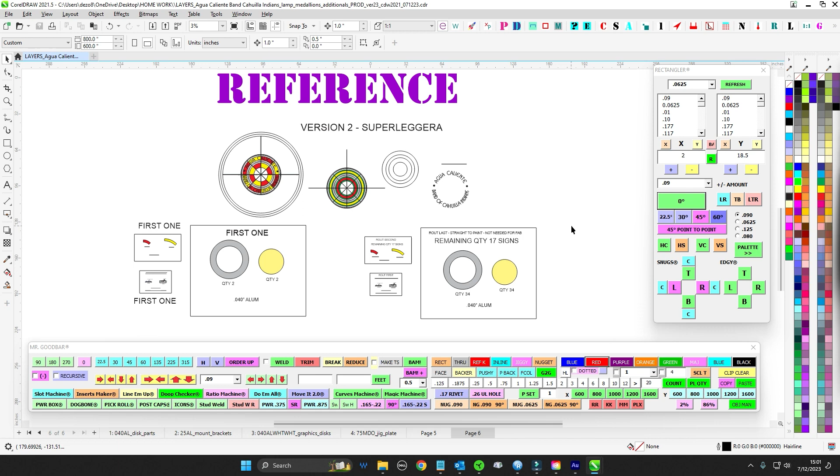So there's a lot of digging in the crates, dusting off, a lot of 'how the heck did we do that' kind of thing. But I think we got it figured out. We have some good documentation, good pictures from last time, so this is gonna help you guys through like 80% of it. It'll be pretty self-explanatory with all the pictures, but there's a few things I want to point out just to make sure no confusion. So let's get after it.

Lay of the land: we are doing 040. Yes, 040. This thing, the whole idea is it needs to be as light as possible. The engineering just barely allowed us to put this up here, and the pole company was very strict about how much the pole could handle. So it's very important we don't call audibles and make it heavier than what we designed it to be. So 040 parts, yes, quarter-inch brackets - look out for these.

And then 040 white on whites - these are just for the graphics, going to paint and then write the graphics, so this isn't for fab per se. You'll have a jig template. I am looking for 3/4 MDO, and it's going to be routed halfway down, and then we're good to go.

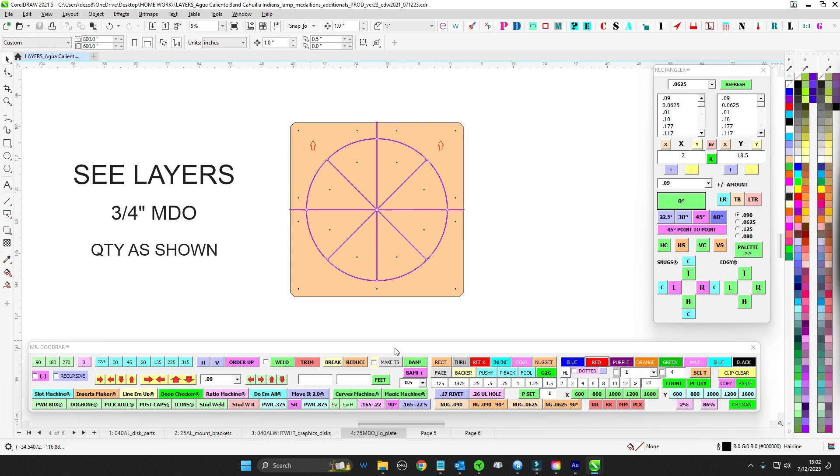So like I say, there's not a lot going on, just want to point out some stuff. So the main thing is let's look at the pictures from last time. It's great - so this is what you're aiming for.

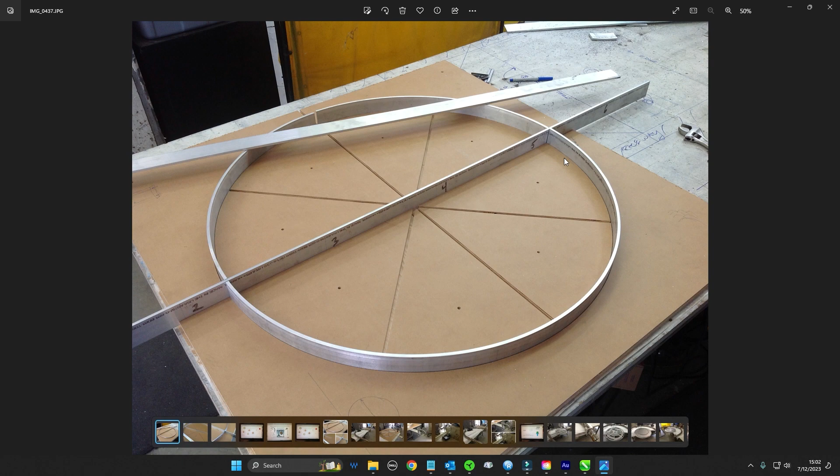You're going to be getting this jig again. Now, unfortunately, I mean it's great we have pictures, but this was the first prototype and we did it out of 1/4 inch, thinking it would be light enough. This was Ernie - Ernie knocked this out, he did an amazing job. What's up, Ernie? So anyway, we're just replicating this, but we are doing it out of, look at that, Corel 15. Good Lord, I didn't know what I was doing at all.

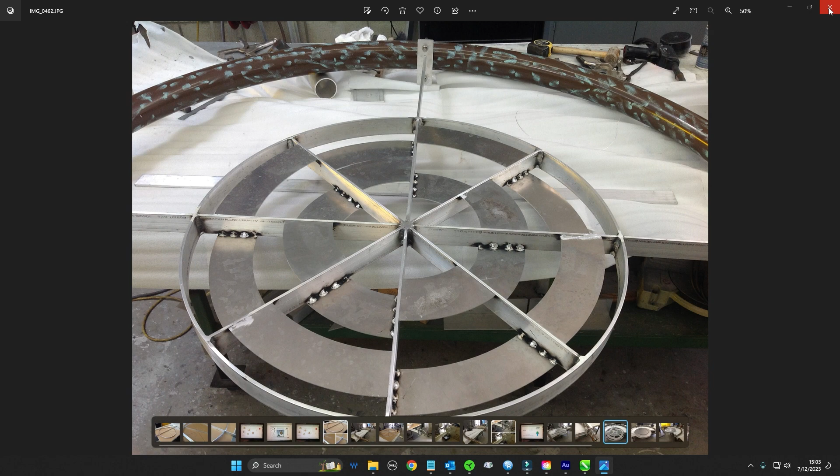So anyway, what you're going to be doing is looking for this. Obviously your brackets are very similar, everything's kind of the same here. So again, the pictures do all the work for you - you can see what you're aiming for. So let me show you how we'll get there. Looking for this, get your jig ready to go.

So first and foremost, cut list. Your main bar is a known, easy number, 68.5. Your tall boy here is an easy number. And then you have one drop down here, 17 and 13/16.

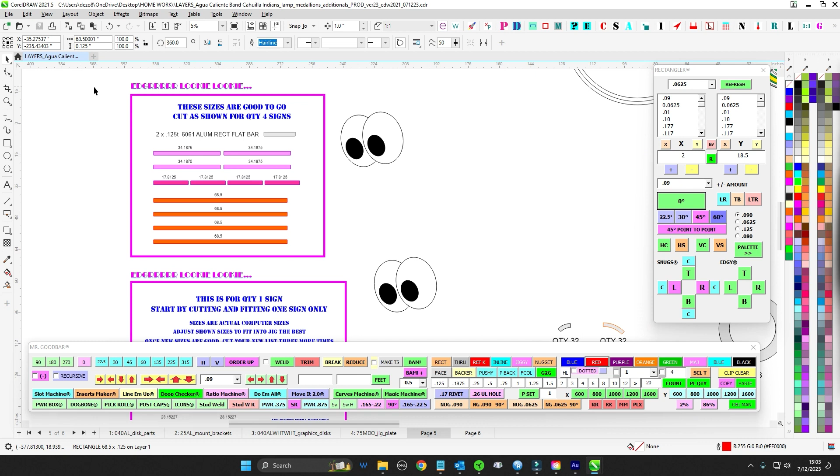So you have 2 cut lists. The first cut list is all the known parts that are good to go, so go ahead and cut all these parts. This will be for 4 signs, 4 medallions.

And then the other one is going to be the tricky parts that you are going to be sort of custom fitting on there. So that's going to be this top part here, you can see where it meets up - this is like the top bar that goes out, that's this guy here. So you'll have to custom cut this one to fit. The bottom bar is one wrap around like that, so you'll have to custom that.

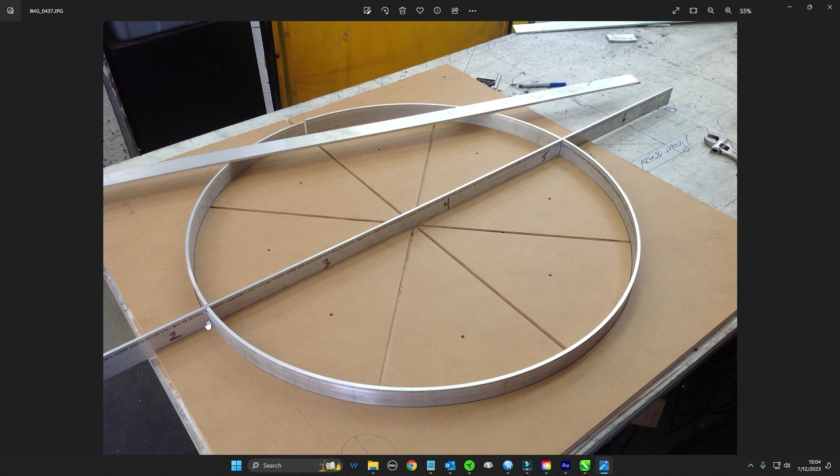And then, so those are the ones, plus these ones that are at 45 will also need to be cut. You can see here he's got that little extra that he cut off. So that's what I'm saying, is that you'll have 2 cut lists.

On this one, I encourage you - I went ahead and put the computer sizes. I know this doesn't do you any good with a tape measure, but these are your 4 diagonals. So how those diagonals fit in, like this is kind of funky, and then how they're going to butt up against here on the curve. So get your curve in there first, and then how that cuts.

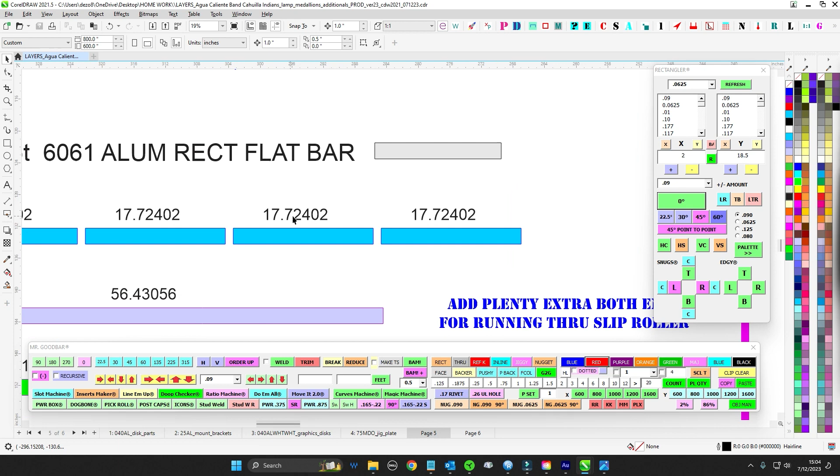So you can decide what this means to you. Once you get those kind of noted and how you like them, then note that 56.43 is what it takes to go around by the computer.

But then you might want to go ahead and add on 4 inches on each side, like here for the slip roll, right? And then add on 4 inches or 3 inches over here for your slip roll as well. So go ahead and figure that out, add that up, and then you can start chopping those.

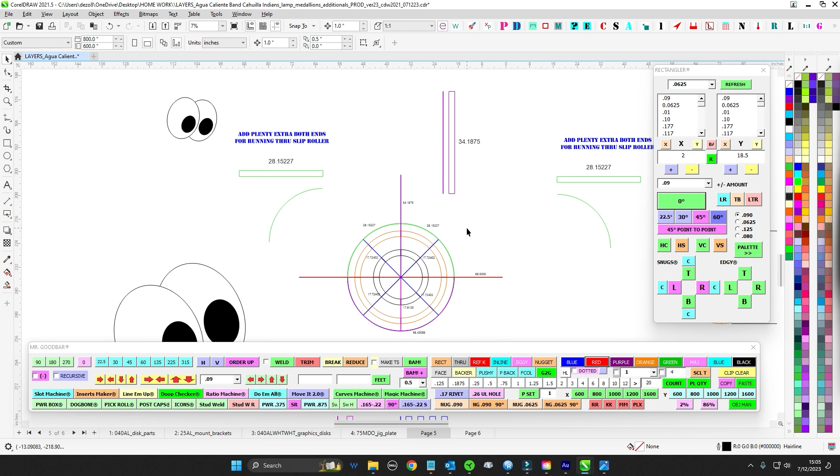Same thing here, 28.152 is what it takes to go from here to here. So go ahead and add on your slip roll material there, and then get it dialed in. So you can cut this list first, dial in one of them, get it dialed, and then cut all the pieces you need for the rest.

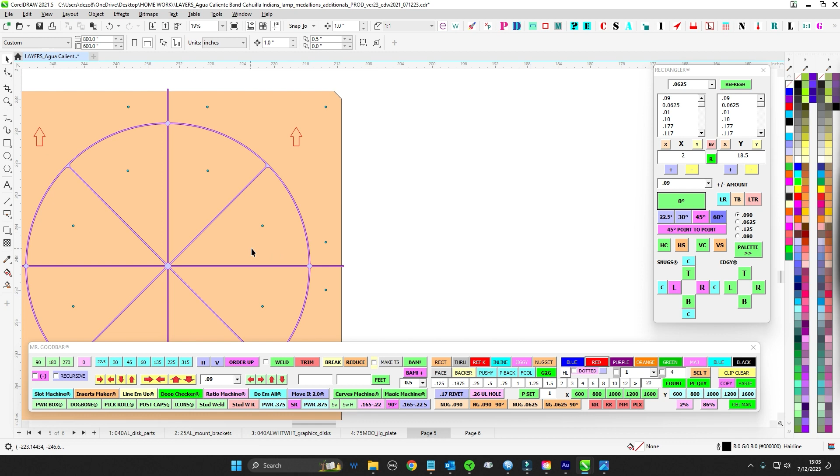What I encourage you to do is while you have this wood jig out, go ahead and put marker and mark it right on the jig what sizes you cut for this one, and put a little arrow saying cut this one to XYZ, whatever it is. That way when we're done, we'll put this up in cold storage. Mark the job and mark the date on it. I don't think there's a reason to throw this away this time, because they might want more, who knows.

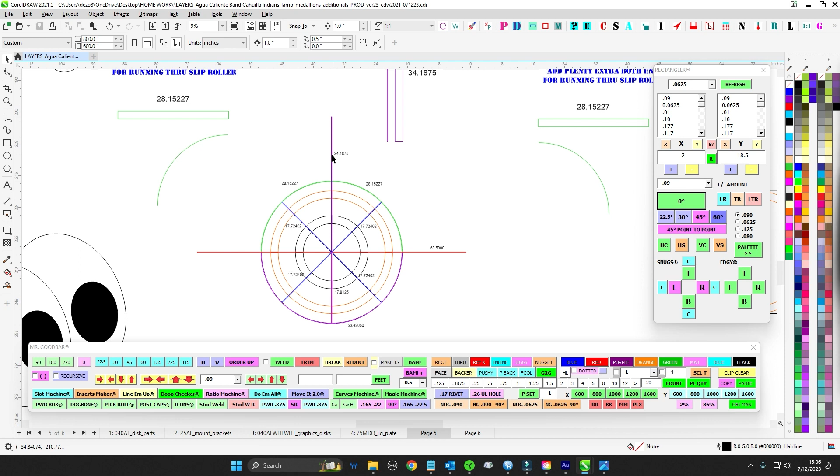So that takes care of the cut list, getting all that taken care of. And then once you have these crossbars, the top one here and this cross one that has the brackets on it, let's get after the brackets.

So you can see how the brackets are going to be. They're like this - oops, get rid of that. Yeah, come on now. So you'll have this part here coming up and this part here, and that hugs the bar. And then you'll just burn it here and here.

Doesn't need to be crazy burned, just enough to hold it together. You can tack on the inside. So that's going to be enough for that. And then you can see where that's going to bolt onto the actual post.

When we first did this, they gave us an actual post. Obviously we probably won't be getting a post from them because we already did it. They assured us that post is the same as the other one, so we should be able to just duplicate what we got.

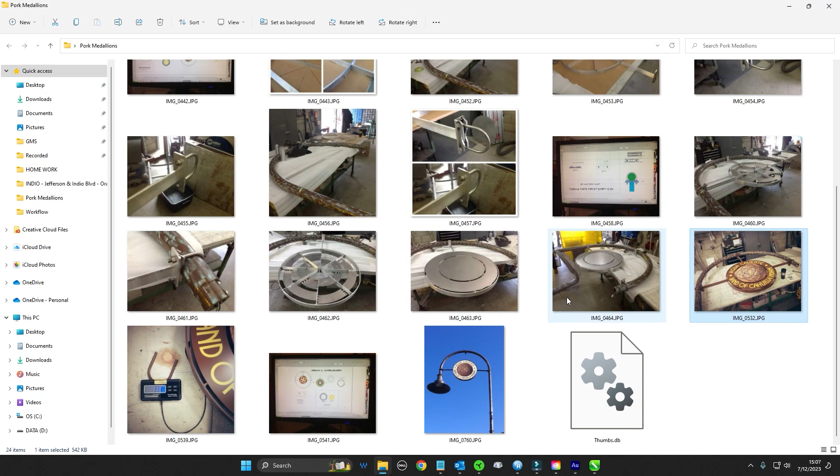As far as the brackets are concerned, what you want to do is slide this bracket onto and match the curve up with the end of the bracket, and that's going to give you your stick out.

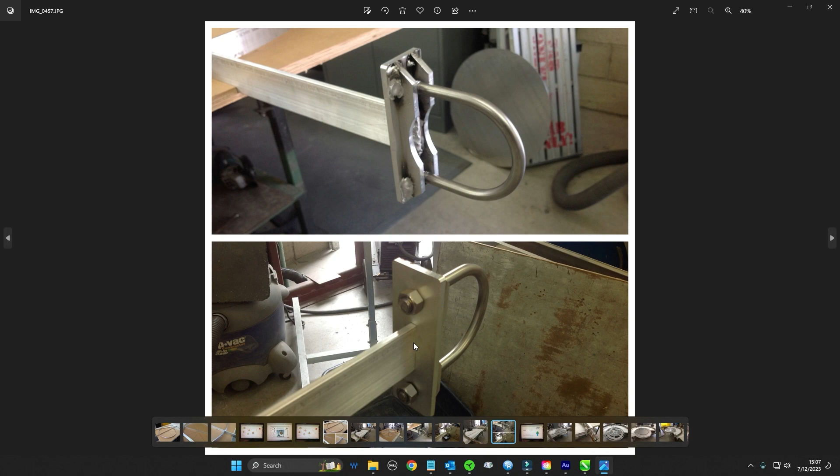And you can see on this one here, we don't weld on the back side. We want to keep that kind of clean. So you're just going to burn on the inside, and that's going to melt the bar to the bracket there. And that's what's going to keep it in place there. So that's what you want to do there.

Now you can tell Ernie made a pretty good call here where you're going to want to burn the brackets on first before you assemble the wagon wheel. That way you can keep these flat on your table, because otherwise you'll have to burn these vertical, and obviously vertical aluminum is a crappy weld. So go ahead, while these are just flat, burn that on, you're good to go.

And then you can assemble the wagon wheel. Now as far as assembly of the wagon wheel is concerned, I would encourage you to not burn the actual thing while it's in there - try to save it. So just like he's got here, you just want to go ahead and tack it together really well, and then very carefully pull it out.

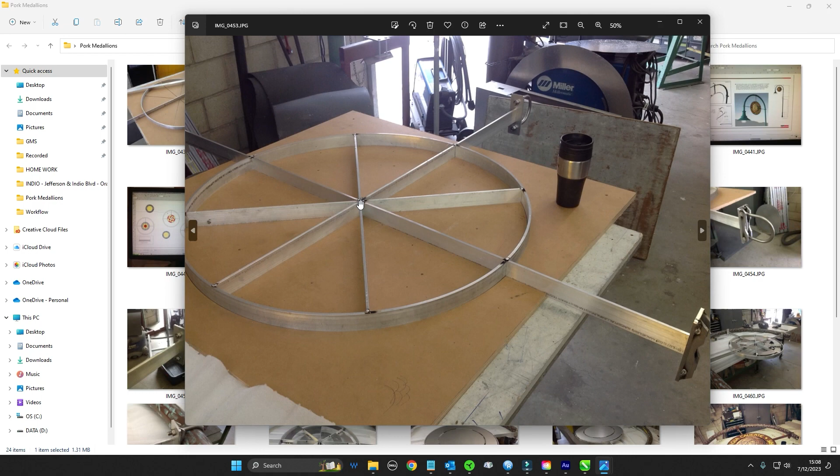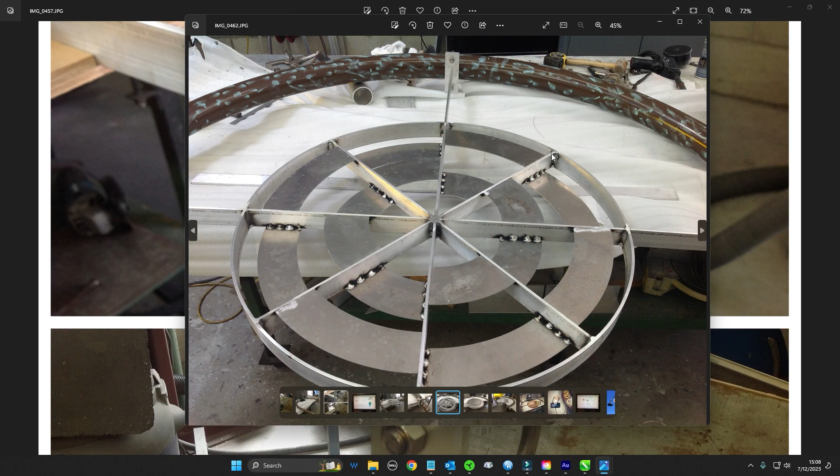Then you can finish up your fillet welds after it's out of the jig, so you're going to have that nice fillet weld go all around. Make sure it's nice and strong, and then you're good to go. Once you're in this position, you're ready to put in these filler pieces, so this thing's all burnt together and you got a nice wagon wheel, everything's nice and strong.

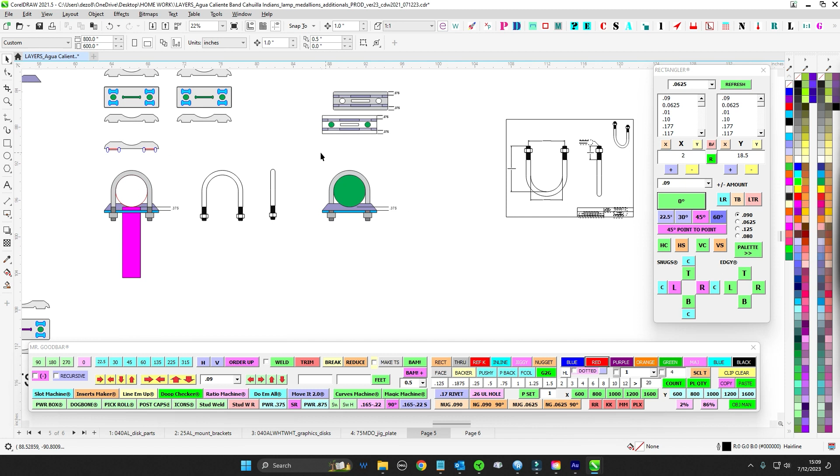Burn it up really well. Then what you're going to do is, let's see, so I got the bracket, we're good there. Oh, keep in mind, I got these ordered up, so depending on when you watch this video, they're either going to be there Thursday or Friday. So we have a bunch of these U-bolts coming.

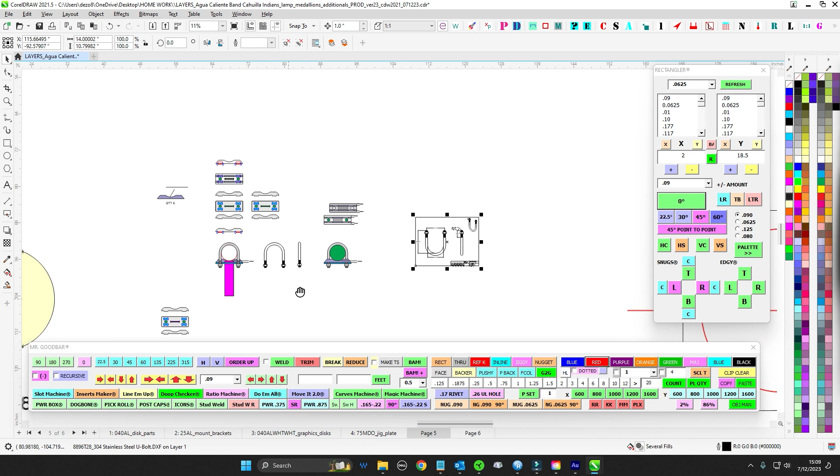These U-bolts do need to go out to paint. So maybe you can coordinate with paint, maybe put holes in a 2x4 and they can hang off one side or something. I don't know, but we got to get those ready for paint.

So when it's time to put these little spacer pieces in, take each of the pieces on the outside, and they make a 31-inch round circle. So if you go from the center mark and go up 15.5 and put a mark there, that should be roughly where it goes.

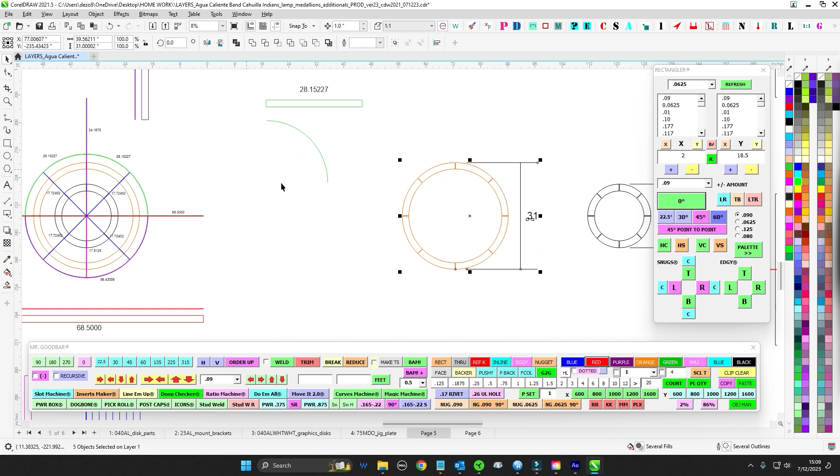These do not need to be perfect. They just need to keep this kind of square and looking good, but they don't need to be super perfect, because if you take that, group it, and overlay it, you can see how much there is to play with.

So when we go to stick on the actual graphic ring like this, there's no way you're actually going to see those little things. So they don't need to be perfect, but you want to make sure they're on there nice.

And that is going to be what we mount those beauty rings to. So when we're done, that's what we're mounting that to, like that.

So these rings just need to get routed and then straight to, that's why we just want white. Route these, get them right to graphics, we're good to go, get them to paint or whatever.

So once you get it to this state, fabrication, you're done. Just send it out to paint and you're pretty much good to go.

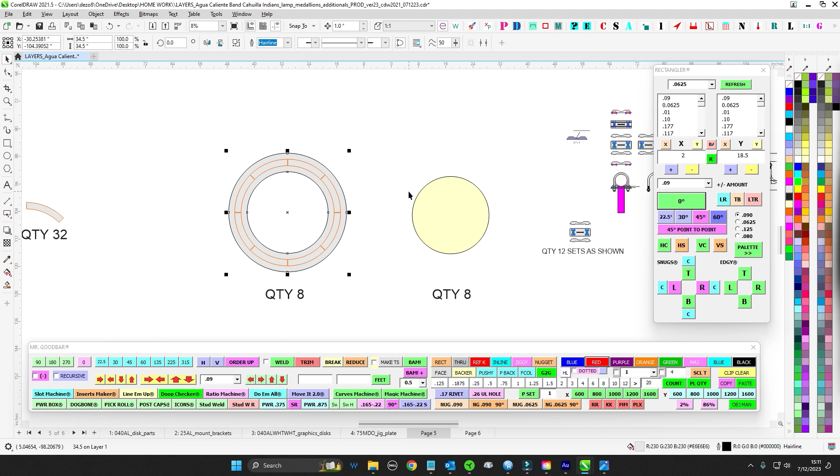When we go to assemble these, check with sales, Johnny, check with install. I'm not even sure we're installing these. I don't know, but check with Jonathan. I think we made a point to put some safety screws even through the face.

Like I say, this was just for test, so this doesn't have any screws. But I think we want to make sure we put some safety screws. It doesn't have to be the big number 10 screws, but something to make sure these don't come off.

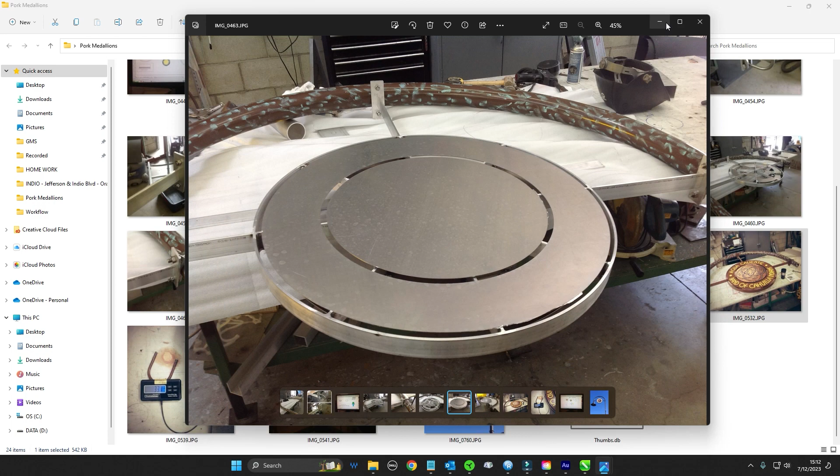So coordinate with Jonathan if we want to assemble these completely here and then take them out or whatever. So anyway, just a heads up there, safety first.